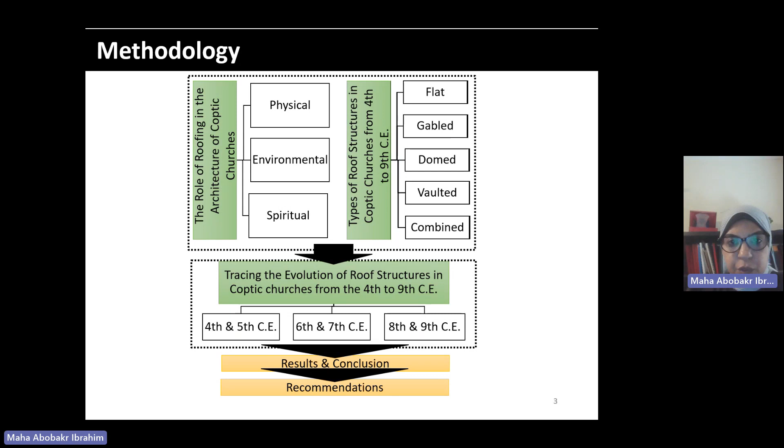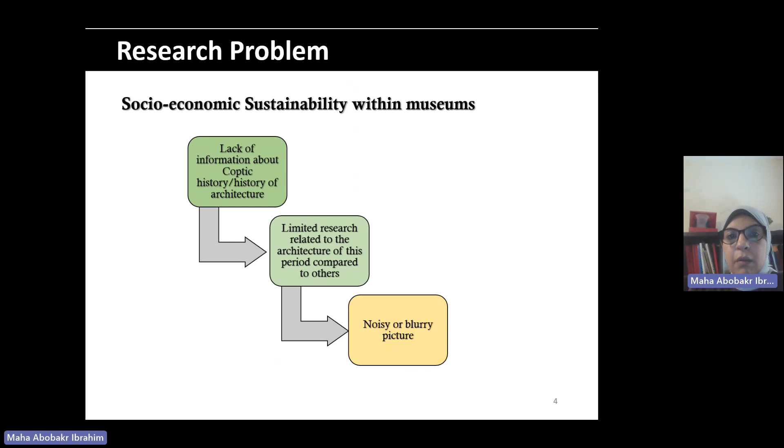Our research problem is that, because of the lack of information about Coptic history in general and the history of architecture, there is very limited research related to the architecture or history of architecture for that period compared with other periods in Egypt. Our goal is to clear the blurry picture of the history of architecture in that time.

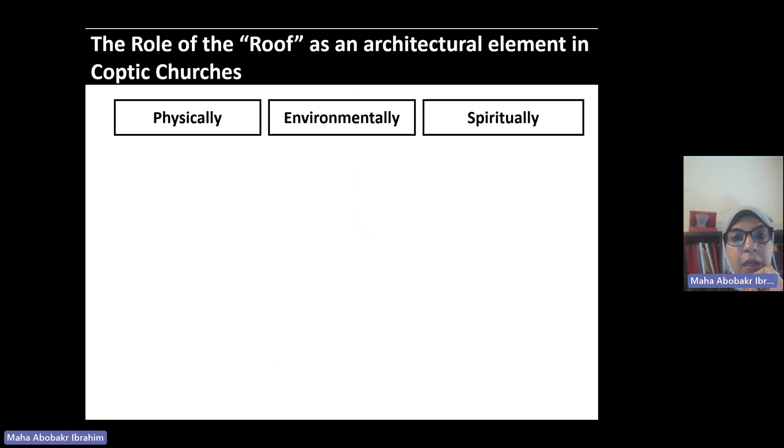The role of the roof system as an architectural element in the Coptic churches played three roles. The physical role is not just a shelter from physical dangers; it is also a means of concealment from the eyes of enemies, because practicing Christianity at the beginning was forbidden. Another evidence for that is the placement of the apse on the eastern side—it is equal to the elevation and not protruded as usual in Roman basilicas.

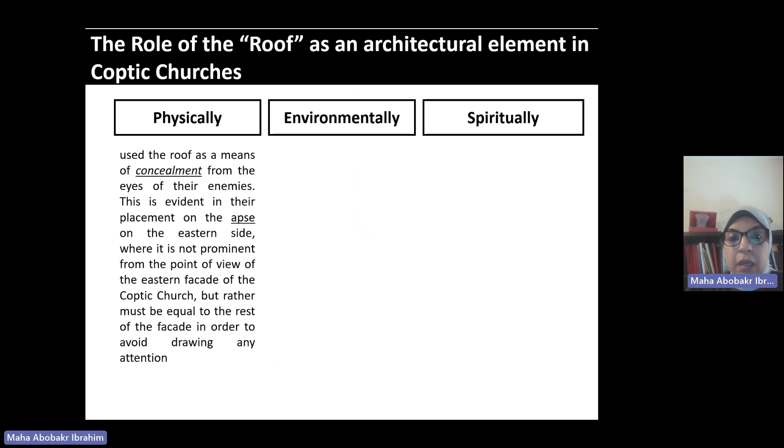Environmentally, studying the Coptic churches and their roof systems illustrates the interaction between the ancient Coptic culture and the local environment in Egypt, and shows their environmental treatments in the architecture and roofing system that produced their own architectural character.

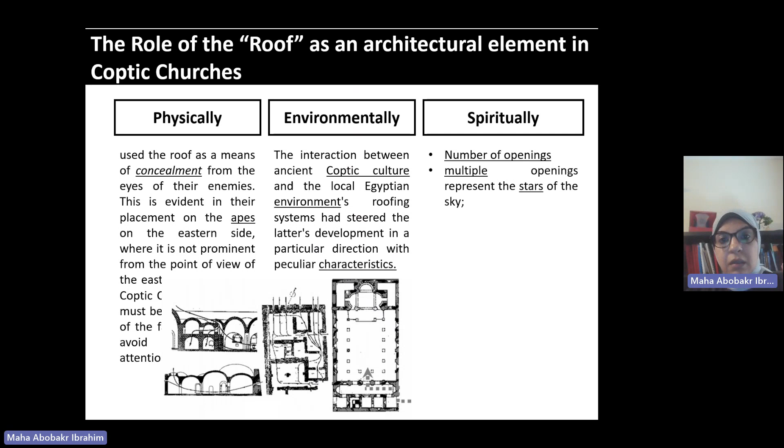Spiritually, the roof system reflected the Christian culture. When they built one dome, it symbolized God. 3 domes symbolized the Trinity. 5 domes symbolized Jesus Christ and the 4 evangelists, and so on. Everything in the roof, even the openings and their number, represents a certain concept in the Christian culture.

By tracing the evolution of roof systems in the 4th to 9th century, we have to look at their inherited knowledge, where Egyptians knew vaults and how to build them since ages before. We can see here the temple of Ramesses II at Qurna, and here the workers' village at Al-Amarna, where they used wooden beams and covered them with a mud mixture.

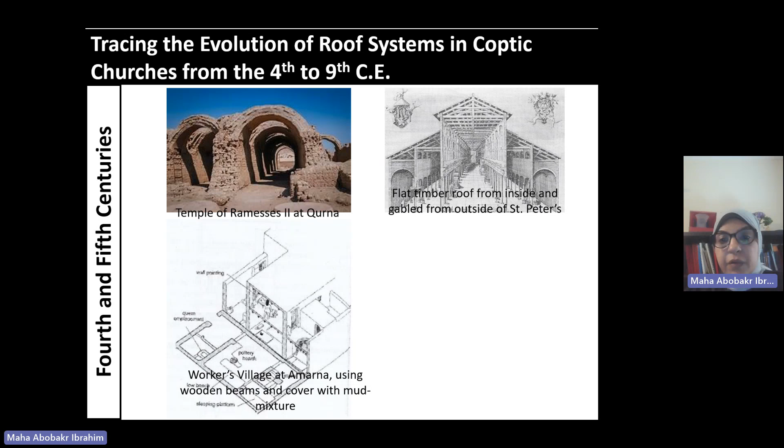Also, there is imposed culture from the Roman building tradition. We see the first reconstruction of St. Peter, a basilica plan covered with a timber gabled roof. Also, from the paintings on the domes of Bagawat that go back to this time, we can notice that they knew the gabled roof and the multi-domed or multi-vaulting roof systems.

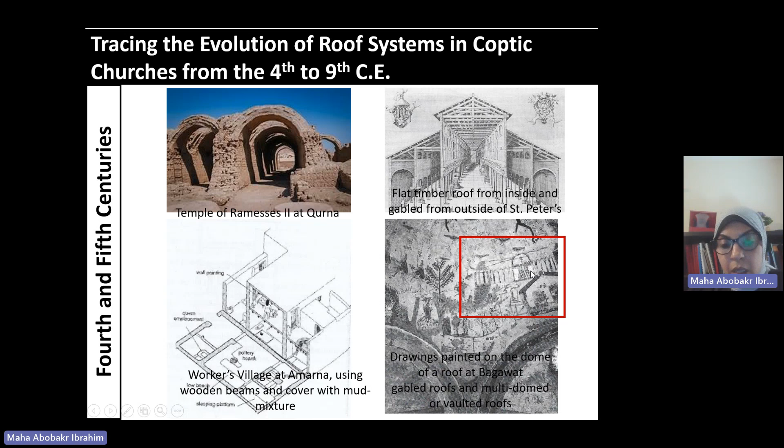This is how we trace, using their knowledge and the floor plans, how they evolved their structural roof systems, where we can perceive that during the 4th century they only used flat roofs and vaulted roofs.

In the 5th century, they used more combined roofs between vaults and flat roofs, or vaulted or domed roofs, like the Byzantine influence of that time. In the 6th and 7th century, they didn't use the flat roof so much; alternatively, they used the vaulted roof, domed roof, or a combination between domes and vaults.

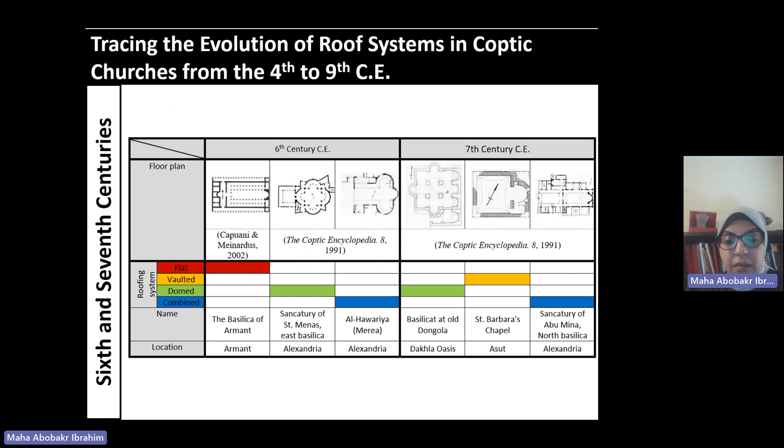During the 8th and 9th century, there is a cross-culture between Islamic and Christian influences. So they tended to use vaults and domes, and combinations between domes and vaults, whereas during the 6th and 7th centuries, the combined roof was between the flattened roof and the vaults.

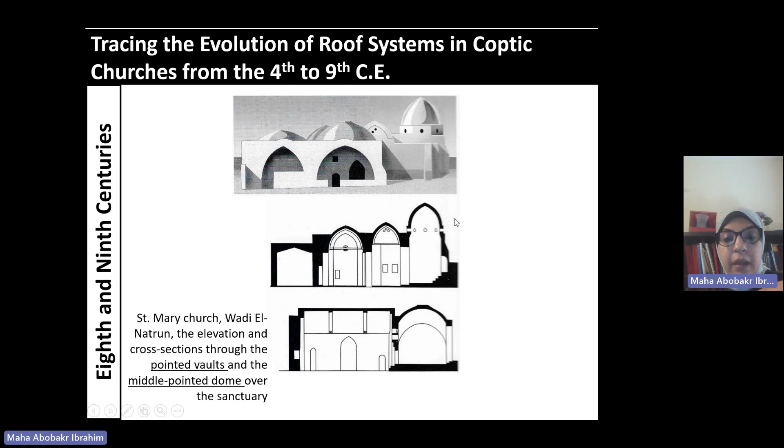Here they use vaults and domes, like the Church of Mar Buqtur at Luxor. Also, the documented cross-section of Church St. Mary at Wadi Natrun shows the treatment of vaults and domes in pointed form, which is an Islamic influence. As long as we have no records proving the shape of the building's construction system, this paper puts forward a set of perceptions

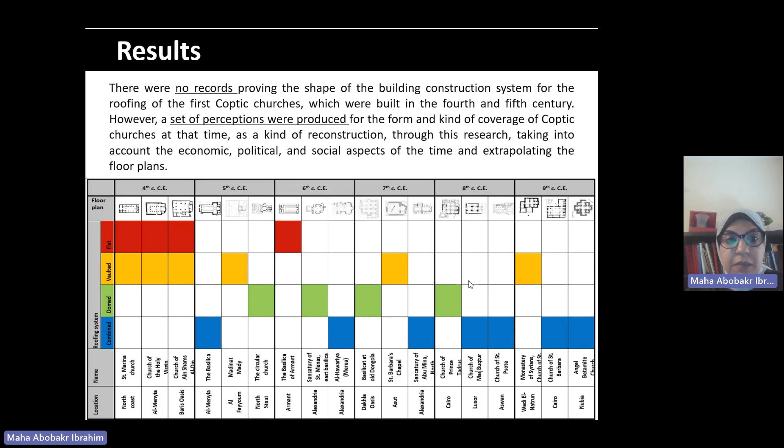for the kind and form of the coverage of the Coptic churches, and here we can trace how this evolution took place. This study also emphasizes the idea of multiculturalism, how the form of the plan evolved over time, as well as the construction techniques and the form of the roof system.

We also found that the structured roof systems during the ancient Coptic periods were not just an architectural element that worked functionally, but had their own dynamics with the local culture, political situation, and social situation. We were also able to illustrate in a tangible way the ancient Egyptian Coptic identity through the overlap between the Christian culture and the local Egyptian character.

Finally, we recommend more in-depth research about the history of Coptic architecture, and to reveal the relationship between Coptic architecture and environmental and sustainability aspects. We need to know more about the methodology of design and semiotics, and there are many fields between the history of Coptic architecture and other fields where we can find relationships.